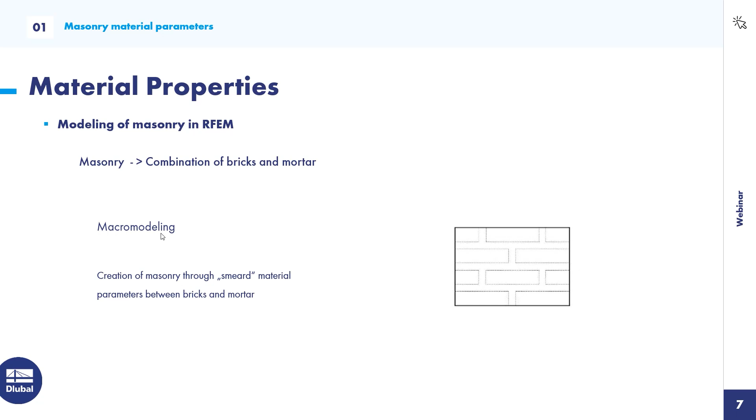The third and easier modeling would be macro modeling. Here you create the masonry as one surface, and the material parameters of the bricks and the mortar are smeared over the whole surface. So this means the modeling is easier, and it's faster than the other two options. One small disadvantage is that if there is a crack anywhere in the masonry wall, you could not define exactly the location, maybe in the mortar joint, because the parameters are smeared over the whole surface. But this macro modeling is what we use in RFEM.

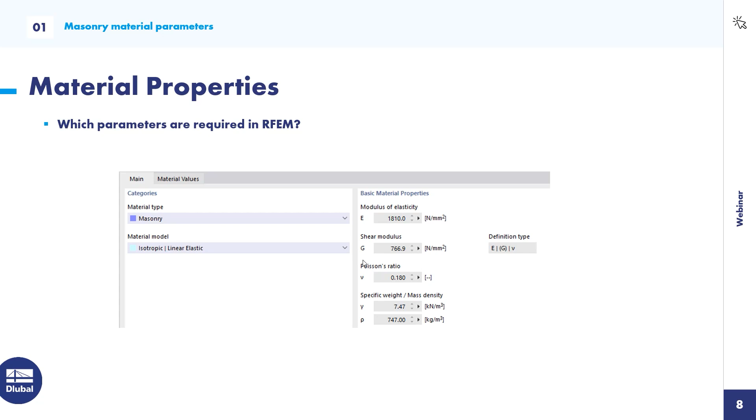So what do we need for material parameters in RFEM? For the first step, computing the internal forces, we only need the modulus of elasticity and the shear modulus. This is everything we need for the first step. So how could we get an idea about these elastic and shear moduli? Here we find an answer in the Eurocode.

The determination of the E modulus is defined by one factor. It's about 1000 for clay. It's in a range of 800 to 1250 for calcium silicate, or maybe 2050 and 2700 for manufactured stones. This multiplied with fk, the characteristic strength, is the E modulus. For small stones, for historic stones, you can add a factor for a small reduction of the E modulus according to the height of the brick and a reference height. The shear modulus is quite easy because it is 40% of the E modulus in this direction. So this is all for the first part, and here I want to switch to the program.

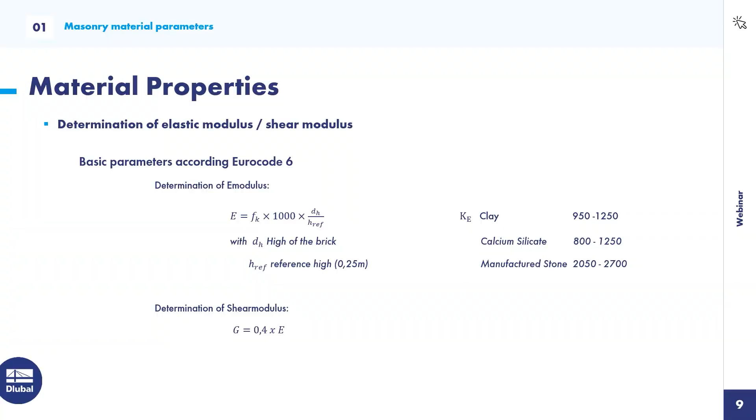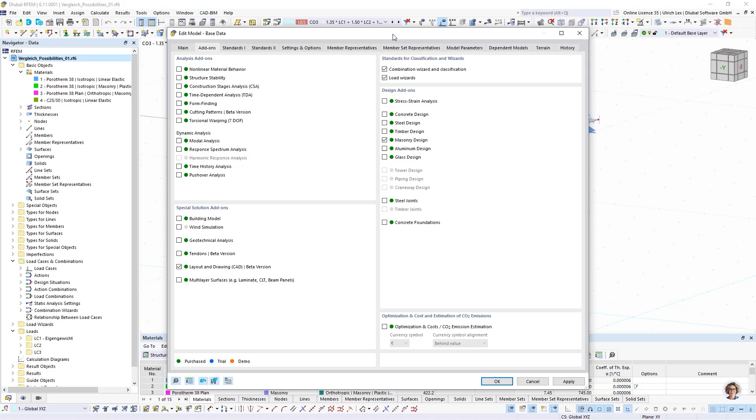So, before I start modeling something, I want to check if in the add-ons in the base data my masonry design is checked on, because this is the most important thing if I want to work with masonry.

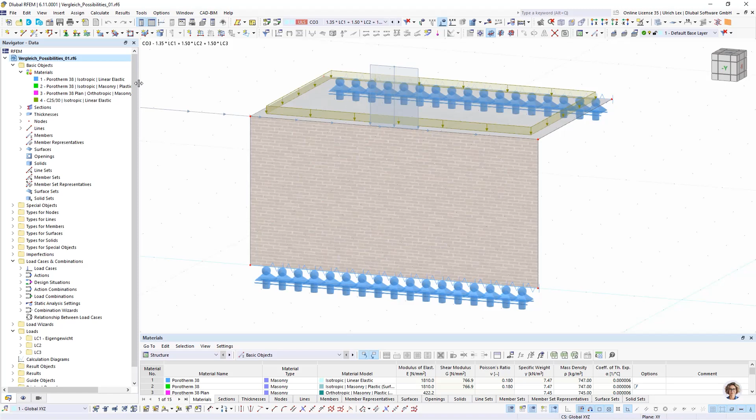Today I prepared a small example. It's one wall with a slab and a defined load above. So I want to show the differences between the material models. That's why I have created some materials, and I want to show you the differences now.

The first material is the material with the isotropic linear elastic material model. This isotropic linear elastic material model is our basic material model. It's the same for concrete or steel surfaces. You only need one E-module, elasticity module, and shear module to compute the internal forces.

When you have chosen the material type masonry, then you have here the possibility to create also an isotropic masonry plastic surface material model. The isotropic option means that we have one E-module for both directions. In X and Y direction, we have only one module of elasticity.

But with this plastic option, you can say that the limit stress for tension is reduced, because masonry cannot handle any stresses for tension. The wall will always be cracked if there is tension. The difference to the first material model: there, tension can be computed. In this isotropic plastic material model not. Here you have the possibility to cut a limit of tension.

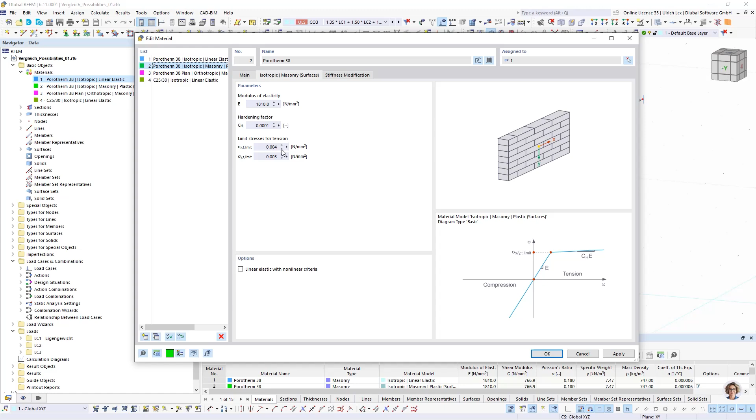So the third option is the orthotropic, and this, I would say, is the most exact material model for masonry, because here we have a different module of elasticity for the Y direction, the strong direction, and the X direction, I would say the weak direction of the bricks, and a shear module is considered too.

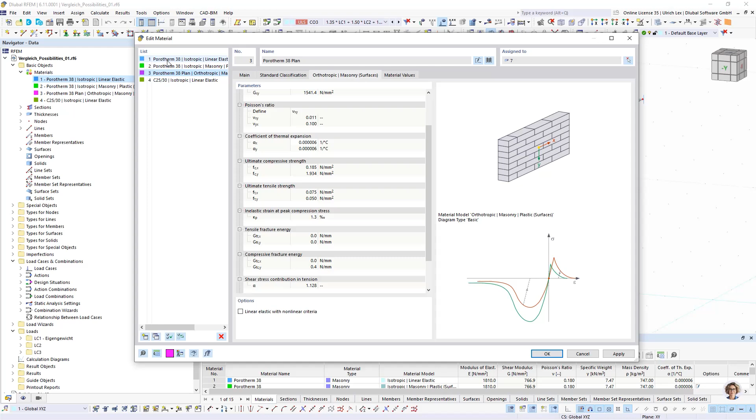Additionally, you can limit not only the tensile strength, we also have a limit of the compressive strength, and these allowable values for tensile and compressive strengths are computed according to the Eurocode. That means, if the calculation with this material model is done, then the design of this wall is done too. So these are the three different material models we have in RFEM.

As a last option, we have one type of thickness. We called it shear-free. You can choose it in the thickness type wall shear-free. That means if you choose this thickness type, this wall can only transfer vertical loads from the top to the bottom, but no shear loads of the system. I will show you later where you can use this thickness type.

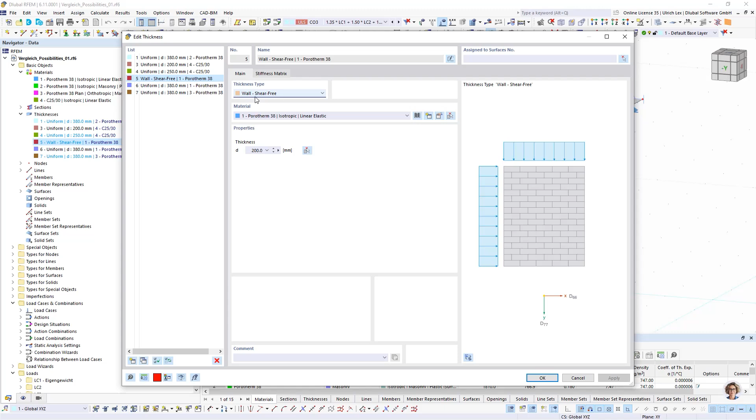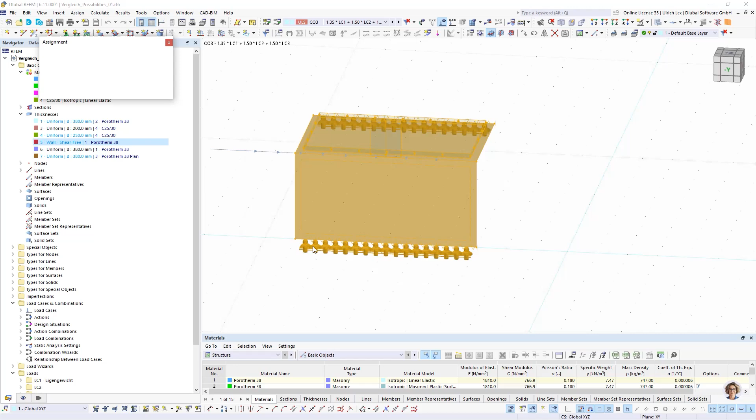Okay, to our system. Here I created one masonry wall with a slab, and I want to assign this differently. I want to create more walls with copy, maybe in this direction, and copy the loading too. 1, 2, 3 times. Okay.

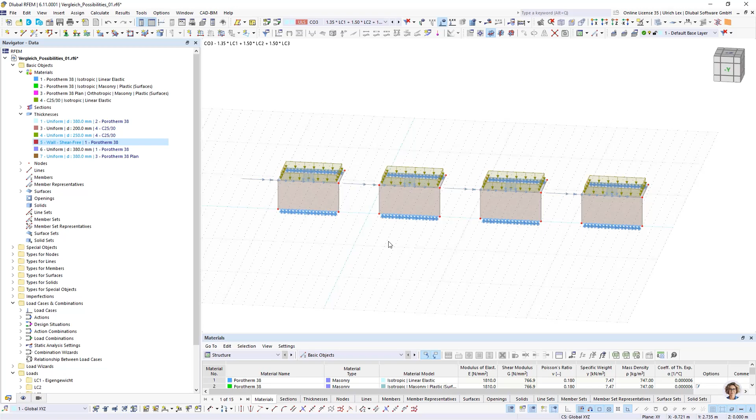So in the first wall I have to assign the isotropic material. In the second wall I want to consider the thickness with the isotropic masonry plastic. In the third case, I want to consider the orthotropic masonry plastic. And in the fourth part, I want to consider here my shear-free wall

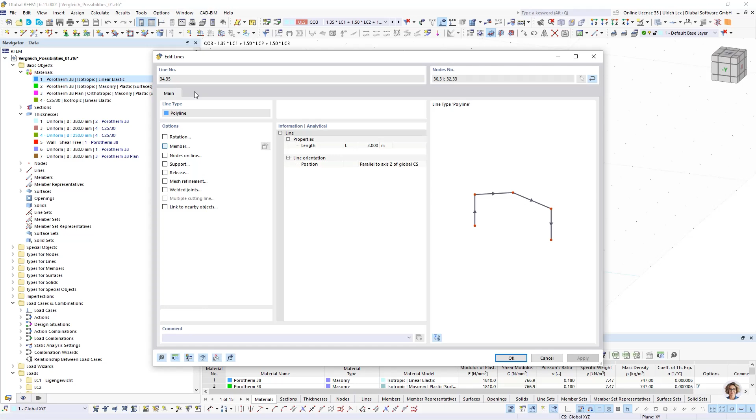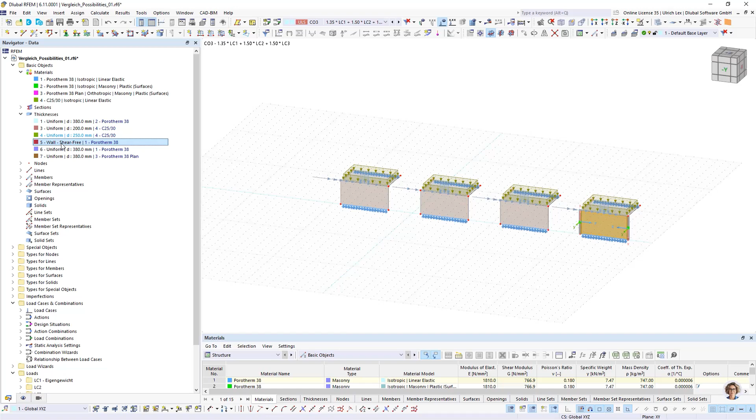thickness type. For the shear-free wall thickness type and the horizontal load, I need some additional elements. That's why I added here 2 beams, 2 members as a column, with a section from concrete. Okay, maybe for this case. So now I have defined in the first step the isotropic material model, the isotropic masonry, the orthotropic masonry, and in the last step the shear-free wall.

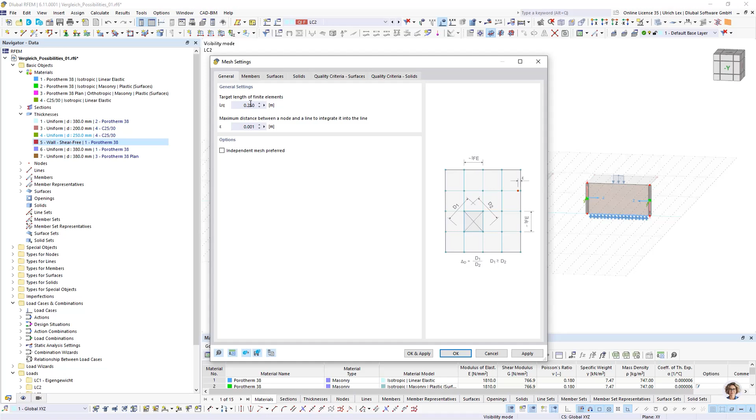So I want to take a look at the easiest load, the vertical load. A short look into the mesh settings. I have a mesh length of about 25 centimeters, and this is the value you have to use for masonry. Okay, now I can compute this first load case.

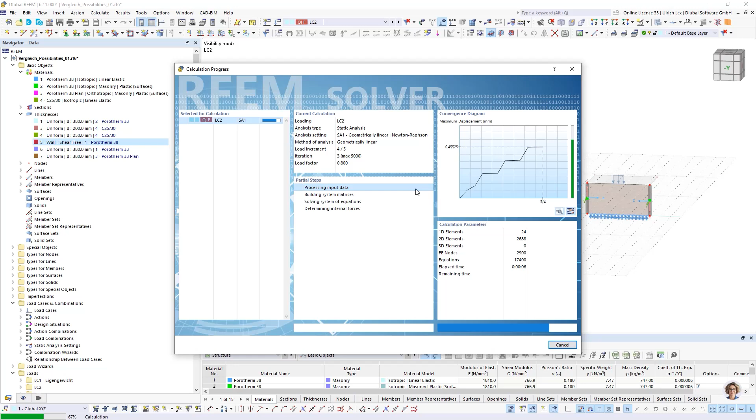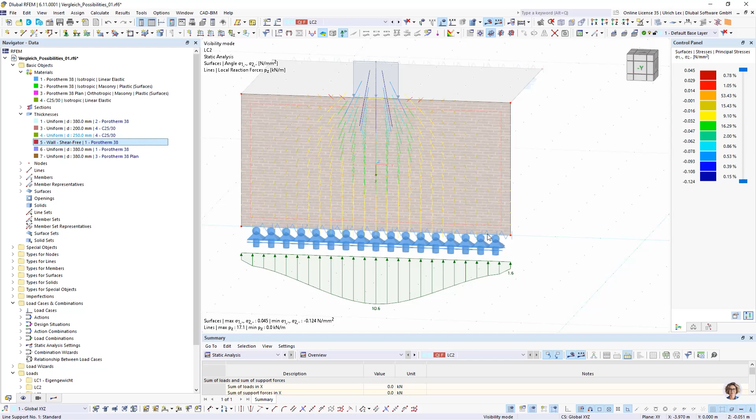So when we take a look at the results, I want to look at the stresses, and here I have something like the load trajectories, where you can see how the load is transferred in the surface. And we see for our first isotropic system that the load is transferred over the whole length of the wall.

This is not as expected, because we would think that the load is transferred at an angle of 60 degrees, and the other parts of the surface would not get any force. But for the basic isotropic linear elastic material model, it's not as expected for masonry systems.

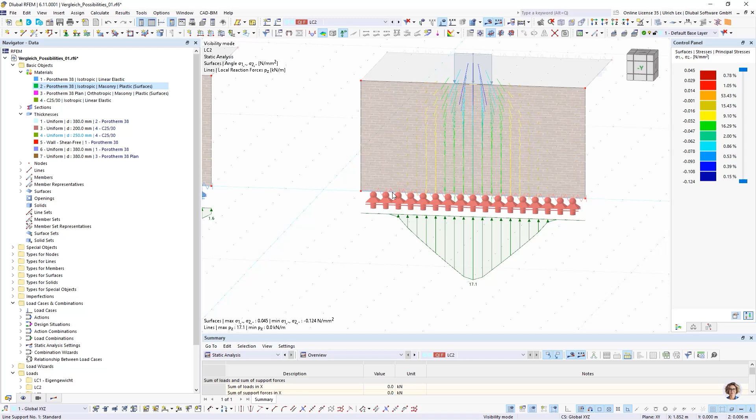When we take a look at the second system, it's better. Here we have no tension force in the system, and therefore I have not such a big transferring to the sides. You see on the support reactions that the load is transferred at some angle from the top to the bottom.

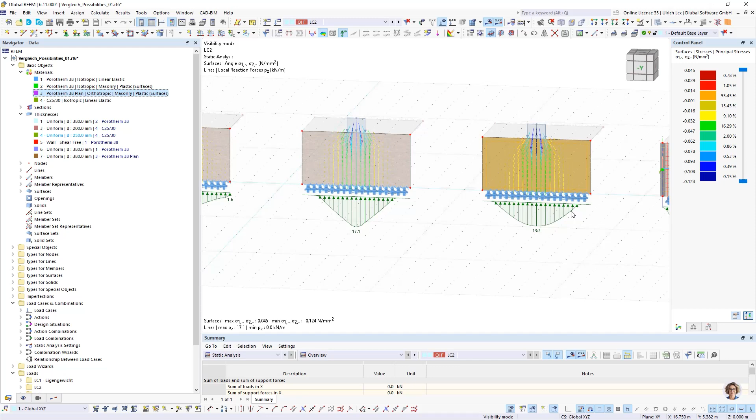When we take a look at the orthotropic system, then you can see it's better than the other two. It's more homogeneous, and it's transferred like expected.

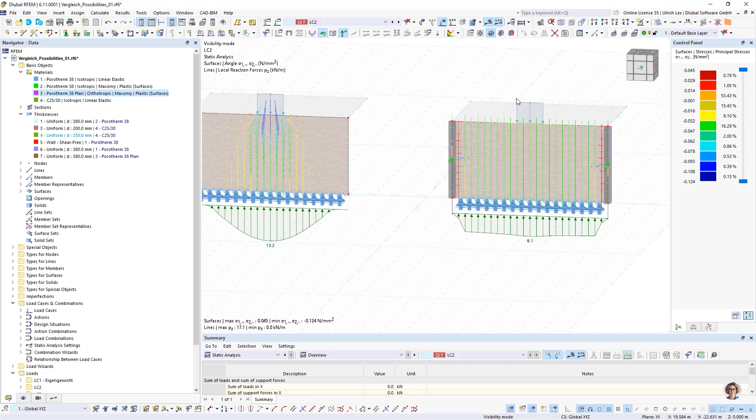In the last part, you will see that there are only vertical loads in the system because of the members on the side. You have a homogeneous transferring from the top to the bottom, but you have only straight loads in the system. It will be more clear when we have this horizontal load in the system too.

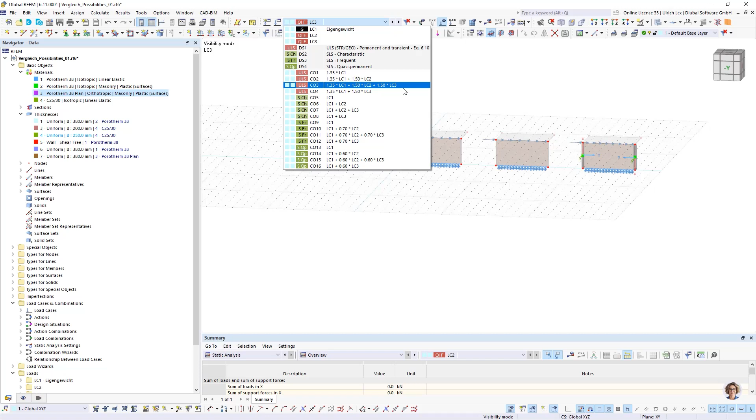So when we add this horizontal load, I want to take a look at the load combination, because in case of a horizontal load, you always need a vertical load, maybe self-weight or an additional vertical load too, because masonry cannot handle tension forces, so you cannot compute only horizontal loads on the system.

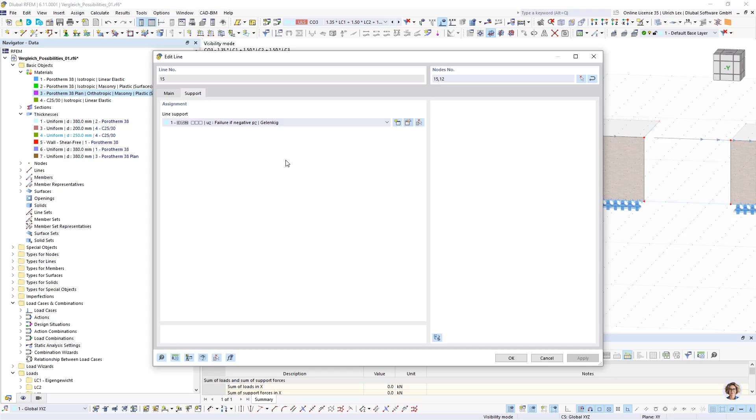For this calculation, I have to modify the support conditions. I have to fix it in X direction. Okay. And now I can compute this load case again. Here we see again that the load transferring of the internal forces of our isotropic system is not as expected.

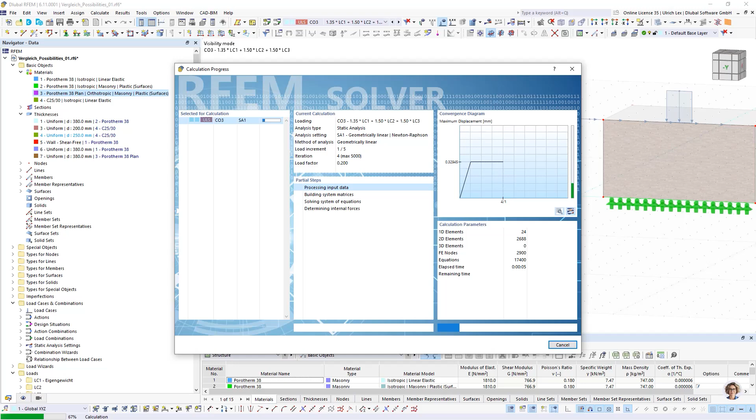Here I can change it one more time, then it's more clear. I can deactivate the nonlinearity, so we can also see the tension in the system when we compute it again. Now you can see that in this isotropic material model, tension forces are also inside the surface, and therefore the load transferring is not how masonry works.

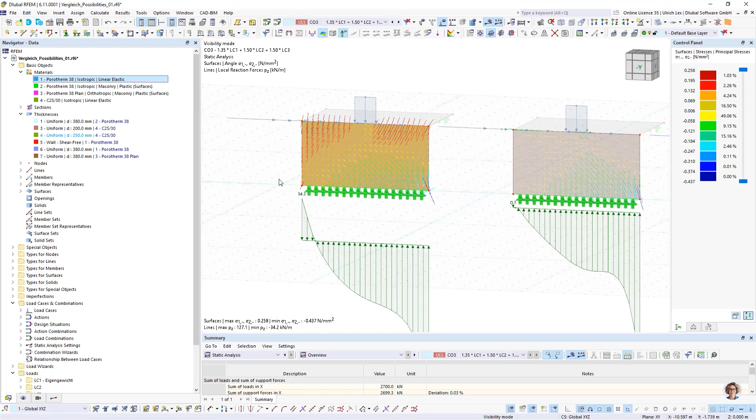So in our isotropic masonry material model, it's quite better. You see that this horizontal load comes into the surface and it's transferred in this direction to the bottom of the surface. It's like expected, but because we have only an isotropic system, so the E modulus in both directions is the same, the exact shear behavior of the masonry is not so well considered with this material model.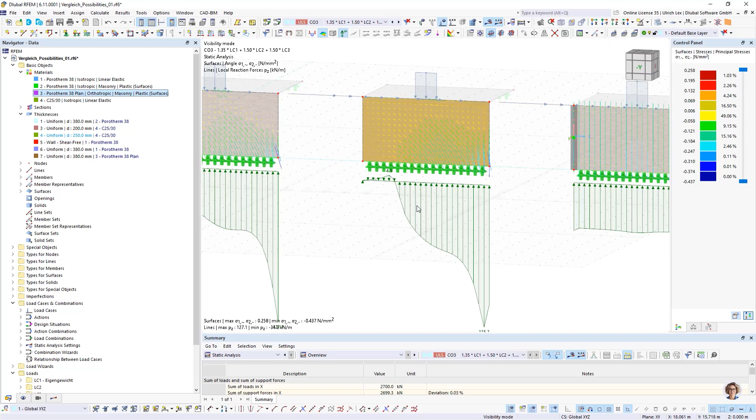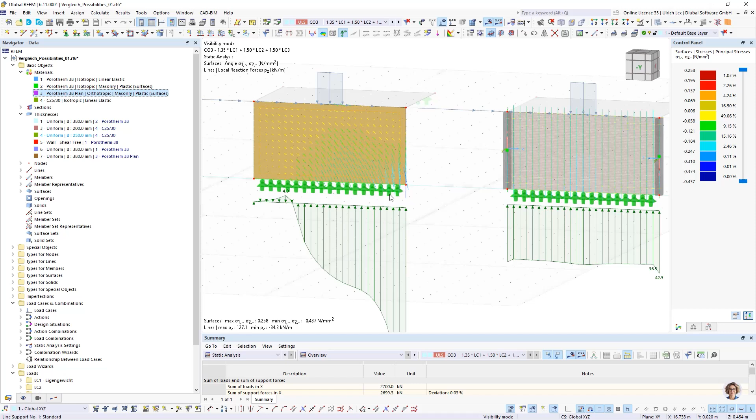The most exact system is the orthotropic one. Here you can see that only tension is like it's defined in the material, and the pressure is transferred in the right way to the supports.

In the last option, you will see that the masonry wall gets no horizontal loads. There are only vertical trajectories in the system. Here we can also take a look at the internal forces. We only have vertical loads Ny in the system. For this horizontal load, something has to be created. That's why I added these concrete columns.

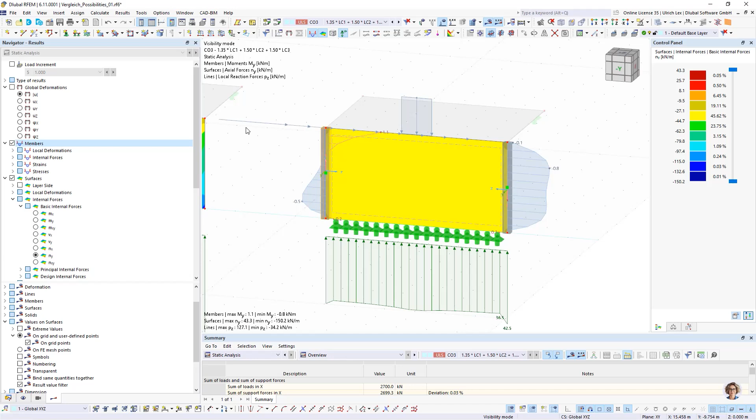You see here there is a moment in this member, because this surface cannot handle shear forces.

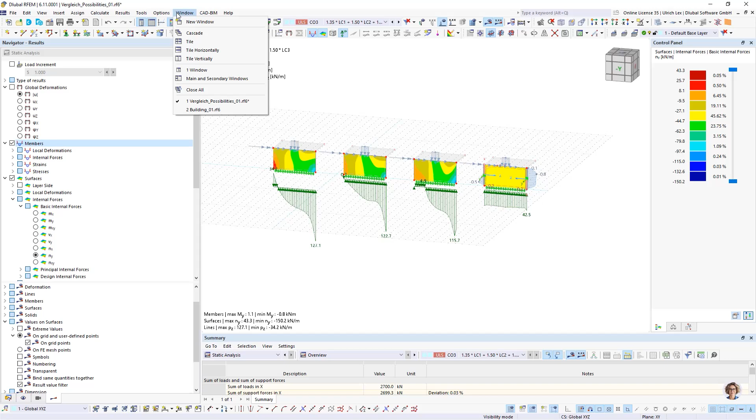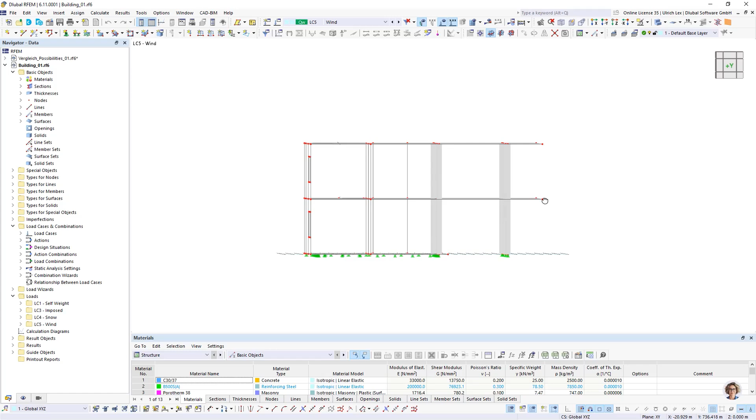Okay, this was the explanation of the different material models, and now I want to switch to the second example, a small building where we can create the masonry walls and compute this. So I have created a building, 2 floors with concrete slabs. In the front, some columns in concrete, and in the back I want to consider masonry walls.

Therefore I defined some materials. One, the isotropic masonry material model for the surfaces which should act for shear forces, and for the walls inside the building, I do not want to consider shear. There I create the isotropic material model and use the thickness type wall shear free.

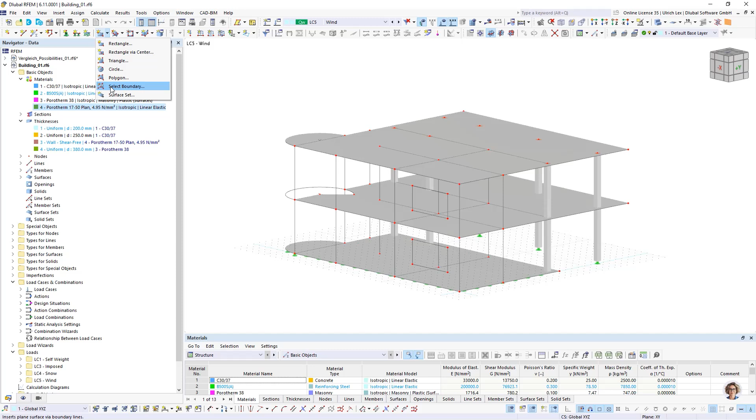So when this is defined, I can continue with creating the surfaces. I use the option boundary lines. I choose my thickness. Okay, and create the walls. So it's quite easy when the lines are there.

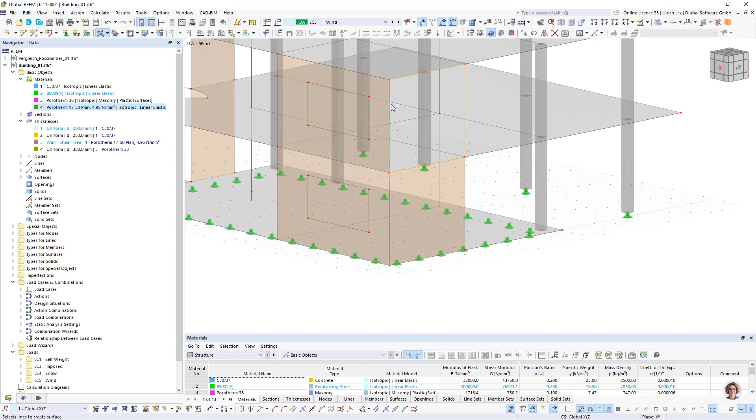And the last one. Okay, for the inner walls, I want to use the thickness shear free and create here my inner walls.

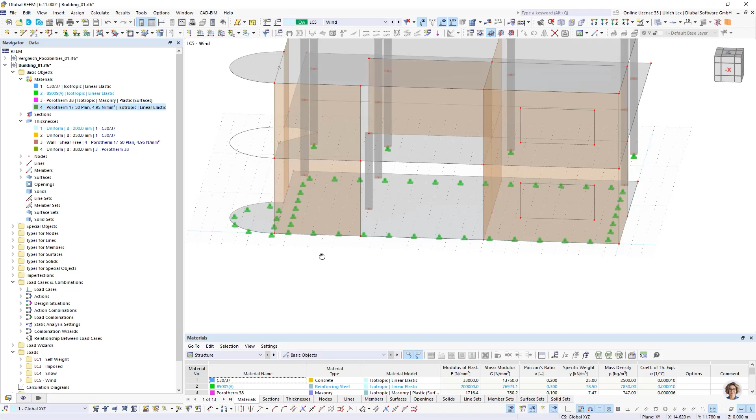So, and upside, I have here one wall. Here I see there is no column. I want to add it here as this member with the section in concrete. And also a curved surface is no problem, but I have to use the quadrangle surface.

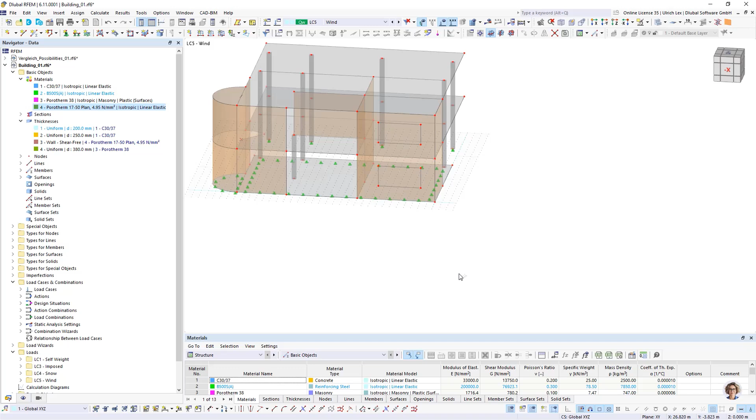One, two, three, and four. So then all walls are created. On these surfaces, I want to add a window, maybe an opening. Here also I can use the option graphically and select only my lines. The opening will be created automatically.

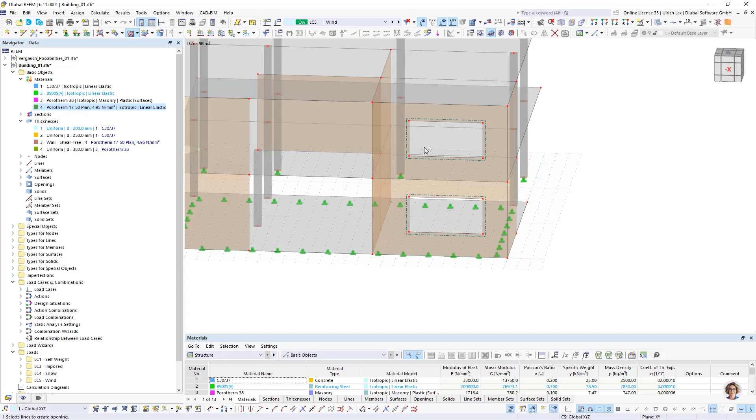On this part, it's important for masonry that when we have some big openings, we always have to assign something like a lintel above the opening, only because of the fact that the masonry cannot transfer or cannot handle tension forces. And if here a big load is assigned, or if the opening is too big,

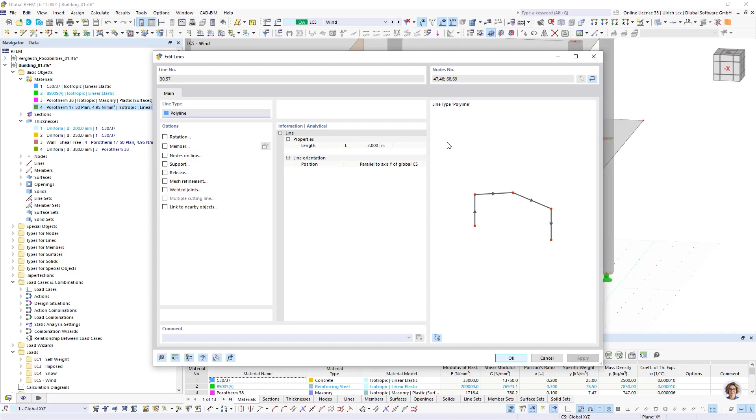then there would be here a lot of tension forces, and this would lead to an instability of the calculation, because the wall cannot handle tension forces, and they could not be transferred to the side. That's why we have here to add something like a lintel. I assign a member and create here a new section, maybe with concrete, with the width of the wall, and the height maybe 10 centimeters.

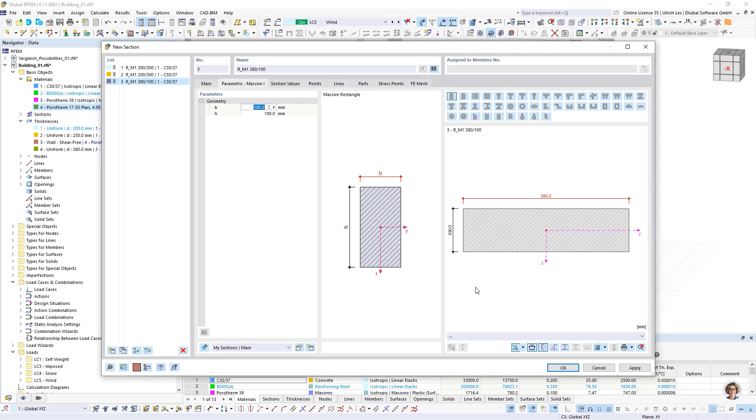Okay. For bigger openings, it would be good to create it inside the wall a little bit, so that the load is not transferred on one FE node here. But in this case, it's okay in this way too.

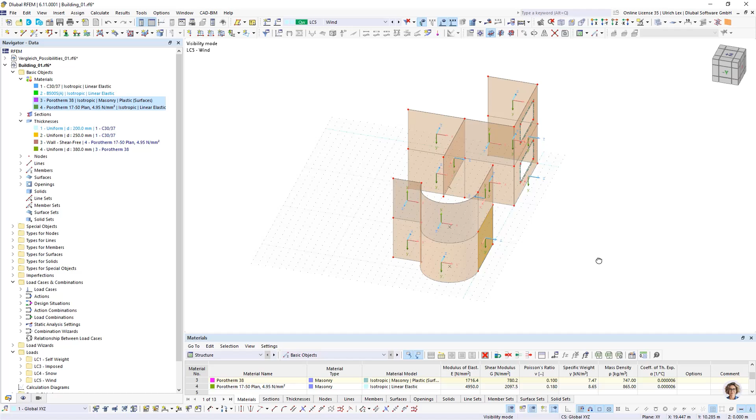Okay. Then as a next step, I want to select all my masonry walls. I want to take a look on the axis systems, because it's better for interpreting the results when the local axis system is oriented in the same direction. Maybe local z goes outside of the building. Therefore, I have to reverse this, and here.

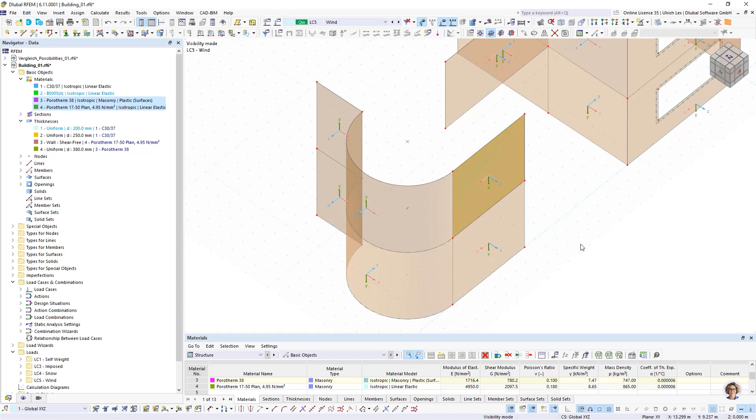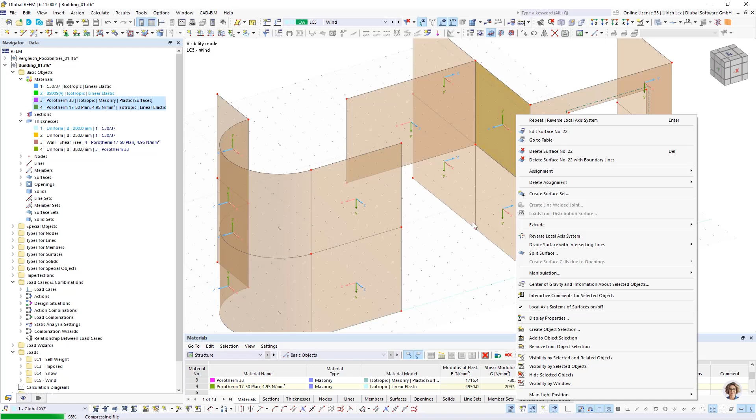Then I can say, when I take a look on the stresses, that sigma x +z is outside of the surface, and sigma x -z is inside of the surface. Here it's okay. This wall is orientated in a different way. And then it's okay.

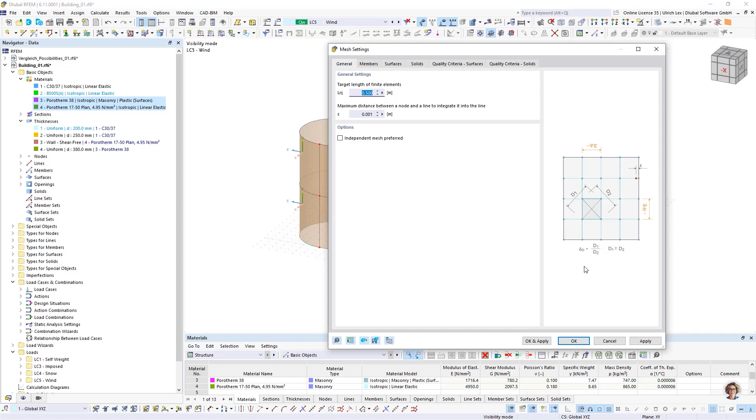As a next step, I want to take a look on the FE mesh settings. Here globally 0.5 meters is assigned. It's okay for the concrete elements, I would say, but for the masonry I would use a finer mesh. Therefore I can select all surfaces, edit, and assign a mesh refinement. I can create a new one, 0.25 meters.

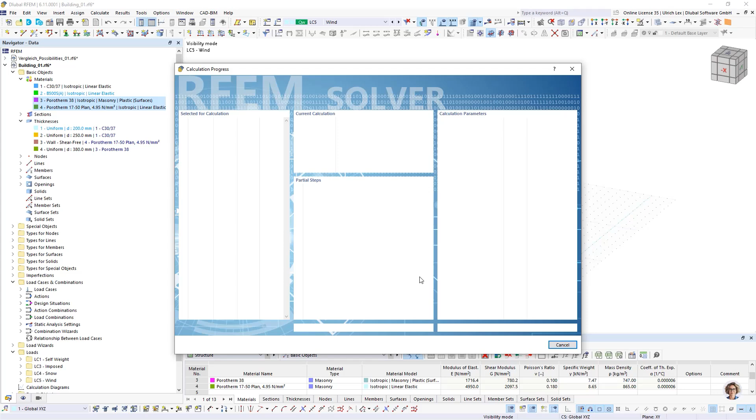Okay, and I want to check if a nice FE mesh is created, or if I have to refine it in another part, but it looks good, then everything is okay. So then I think we have finished the modeling.

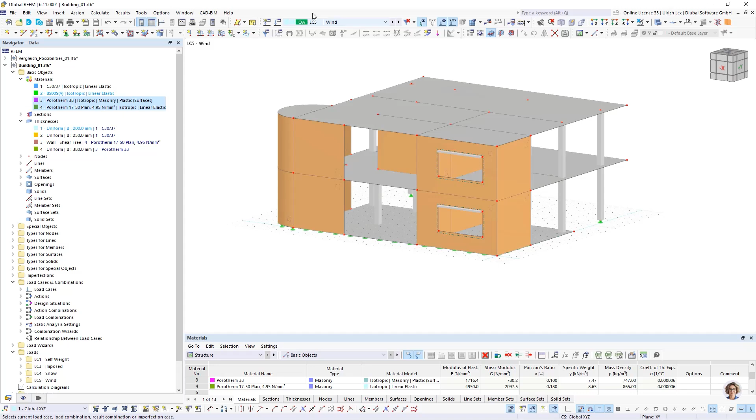Then we can take a look on the loading. I want to deactivate the local axes, so we can take a look at the loading. I have created a load case for the self weight, for the imposed load, a snow load on the top, and I want to define some wind load in one direction. Here in global X direction.

Here I can create a new additional surface. Again, I can select the boundary and use the stiffness type load transfer. Here I have a lot of different options for how the transfer direction should be. Maybe only in X direction of the surface, in Y direction, or in both directions with stripes. Or the more exact thing would be the isotropic FEA option, but in our case I think the stripes are

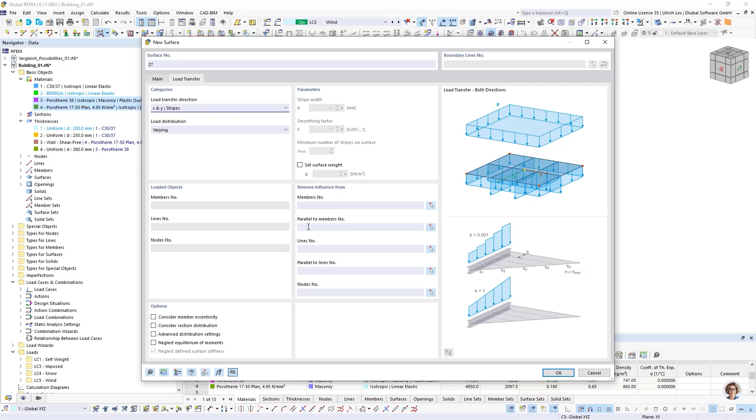okay. I could remove some objects which should not be loaded. In our case it's okay. Can continue with okay, and can create here this surface. The same I can do for big openings.

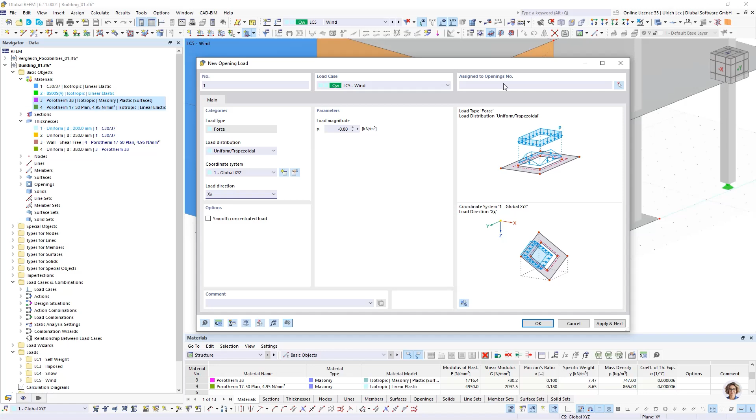For openings, I would have a second option, the option to create directly a load on the opening with new opening load. Here I want to show both options. For the new opening load, I can use one value in X direction and can choose the opening. Okay. Then automatically this load will be transferred to the lines around the opening. I can show also the load on the boundary lines.

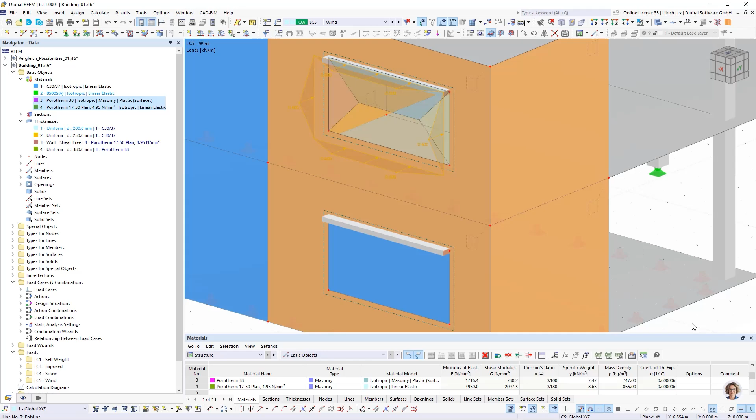So for the load transfer surface, I can use the default or the basic surface load, with the same value in my case, and can choose the surfaces where it should be acting. Okay.

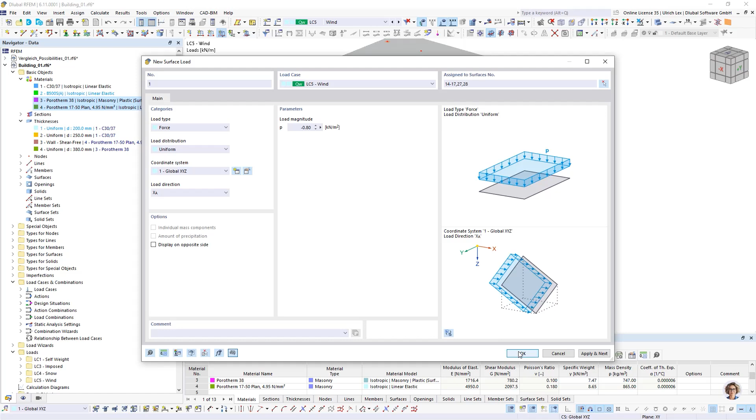Also for the load transfer load, I can show the distribution surface, what is acting on the separate lines. Here you see it's transferred to all lines in a linear way, in the stripes of Y and X directions.

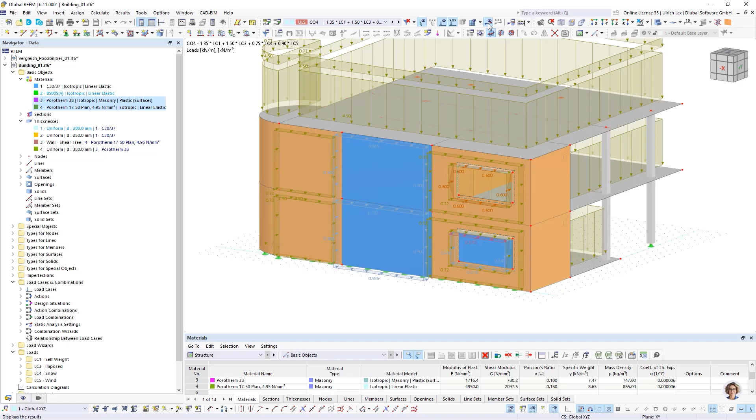Okay, if we have everything defined, then we can start with the calculation. Here I want to compute maybe one load case to take a look at the results.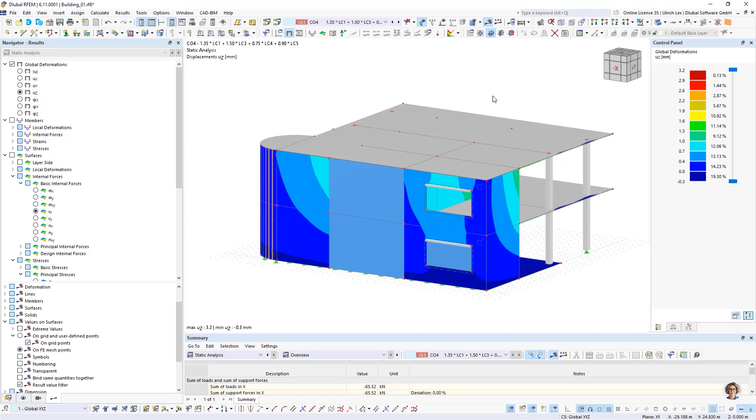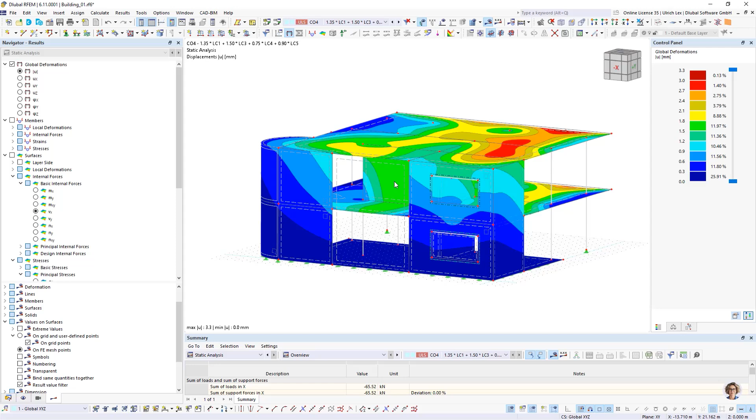The calculation was done without any errors. That's good, so everything is okay. Now I want to show you the results of these inner walls, where we had used the thickness type shear wall, shear free wall. I want to select only this.

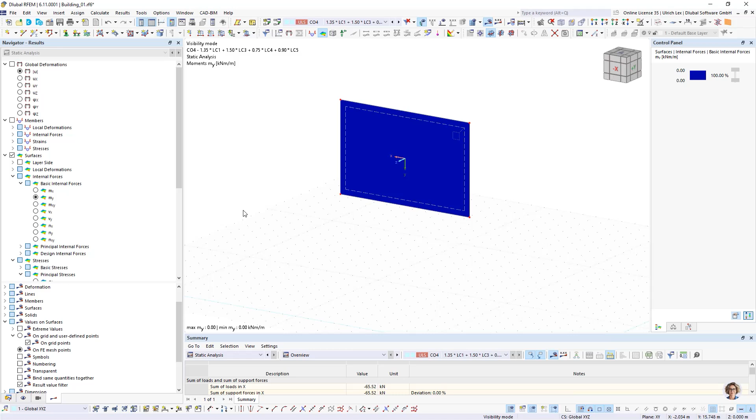So here I can see when I take a look on the internal forces, the shear forces are 0. Also the moments are 0. When I take a look on the axis system, my nx is nearly 0. It's not exactly 0 because it could not be exact 0 in calculation.

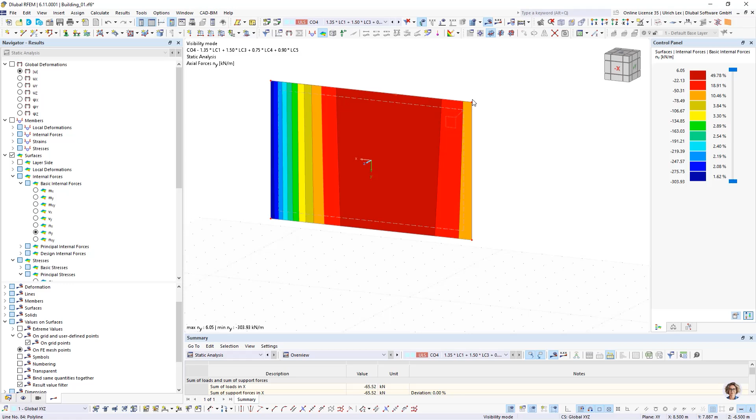So there are small loads in the X direction, but I have big forces in the Y direction. Therefore, I have only loads transferred from the slab in the second floor to the slab in the third floor. That means this thickness type is good when I have masonry walls where a concrete structure takes my shear forces, and I only want the self weight or the transferring of loads from the upper slab to the slab downside. Then I can use this thickness type, shear free wall.

In case the masonry wall should also act for shear forces, then we should use this isotropic masonry or this orthotropic masonry.

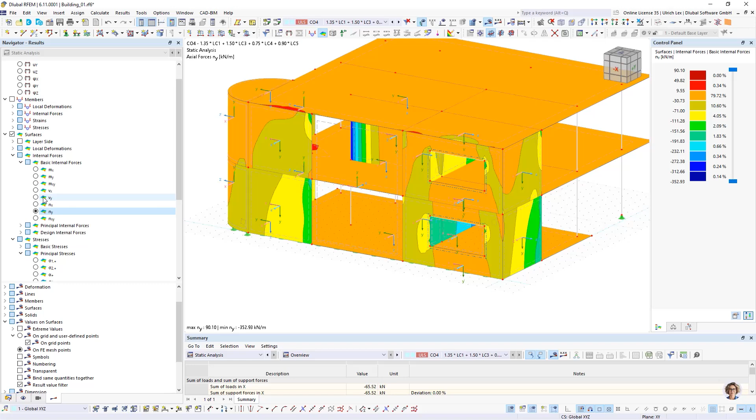For this isotropic masonry material model, I can now take a look here. Here we see that we have load transferring, we have stresses in X and Y direction.

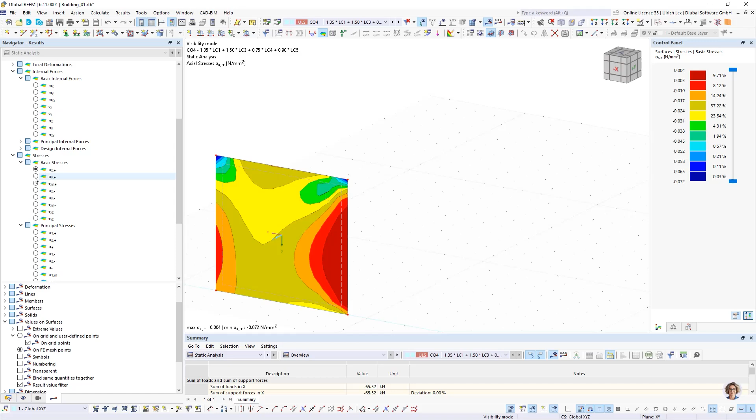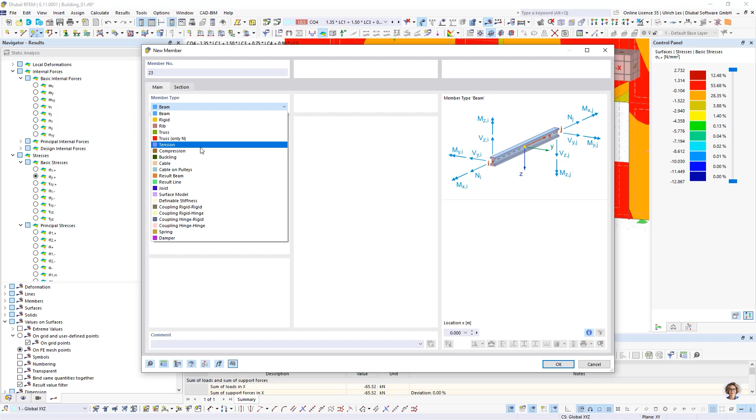You could insert here again a result beam. With the result beam, we could use a block with 1 meter, where we want to include objects, maybe only this one.

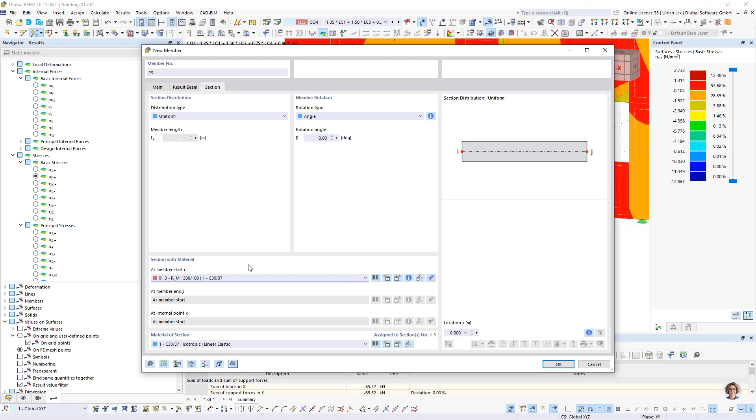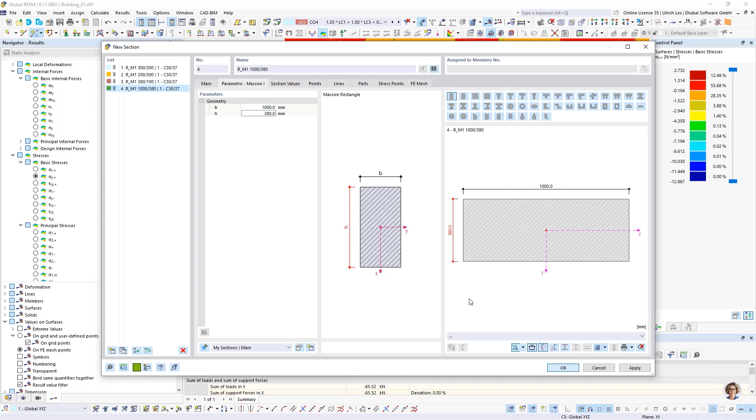Okay, I can create it, it's not important, but I create a new one for stiffness, because the result beam does not have a stiffness. For the calculation, we have here 1000 to 380. Okay, and we can add it here.

Then we have to recalculate it, only because the lines are divided or integrated in the surfaces now. But this result beam has no stiffness for this calculation now.

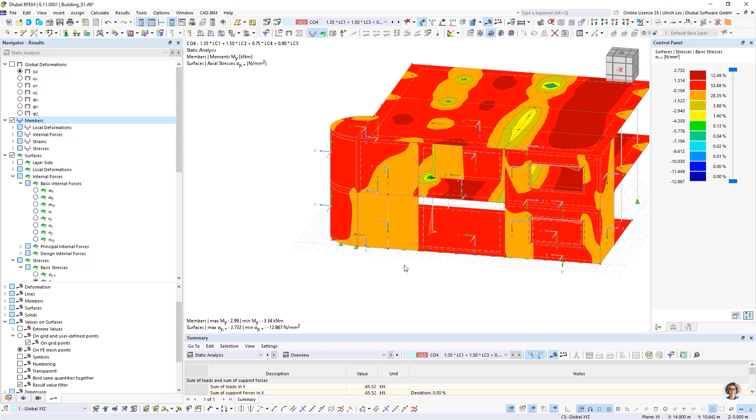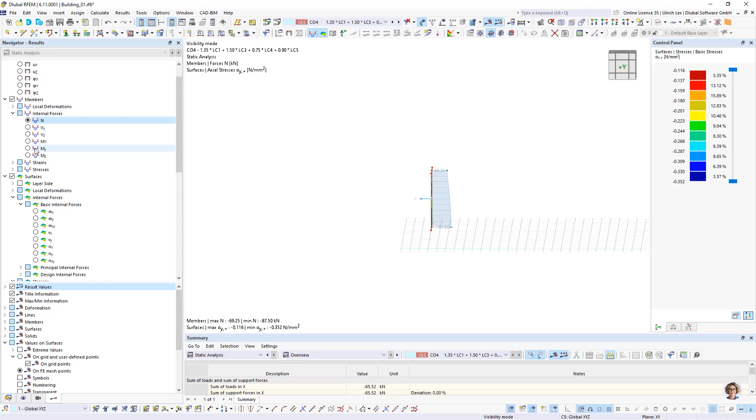But now you have the possibility to take a look on member results. Here you can see the internal forces, maybe for the normal forces, or for the acting moments in this wall.

Because we use this isotropic masonry, you could use now the results of this result beam for an additional design of the masonry surfaces too.

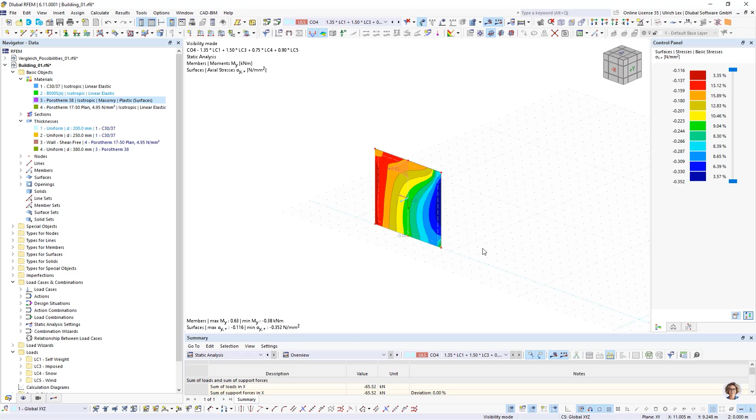So this would be all what I want to show you today. I want to say thank you for listening. I hope you enjoyed it, and I want to give back to Andreas.